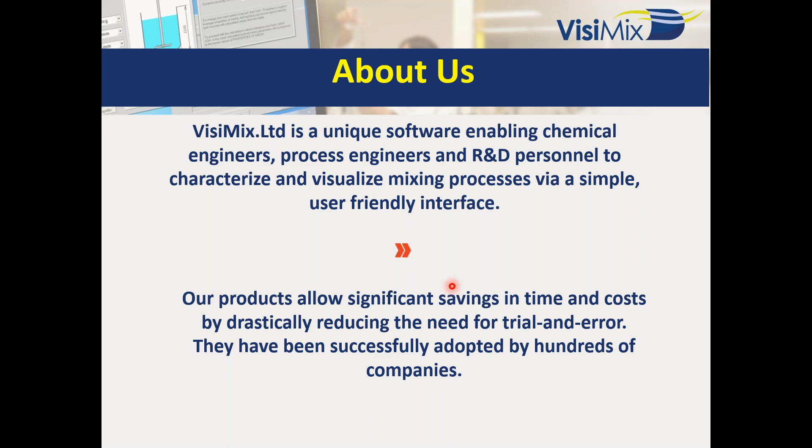The software was developed by Professor Leonid Braginsky and his team. They developed the model when they were in Russia, and they needed to provide the government in Russia answers about what will happen with the process in the next step, meaning in design, in technology transfer, or in scale-up. In order to do it, they developed a model for themselves that describes the mixing in a tank.

This model is our model, okay? This is a unique one. To solve it, we use numerical methods to solve differential equations. We use empirical data to be sure that it's relevant and representative. And this is what they developed. Once they came to Israel, we transferred all of this knowledge into a software package. Over the years, we developed more and more software. We now have more than 10 products that support the chemical industry in transferring technology and making sure that the process is safe and that you can progress in a good way.

So this is the summary of what VisiMix is doing. We solve the momentum balance. We know the velocity of the flow by a combination of fluid mechanics theories and empirical data. Once you know the geometry and the density and viscosity of the media, you will be able to calculate this velocity. But if you include other inputs, you will be able to know the solid distribution, the drop size, the heat transfer coefficient, the mechanical stability of the shaft, and more. All of them are part of process safety.

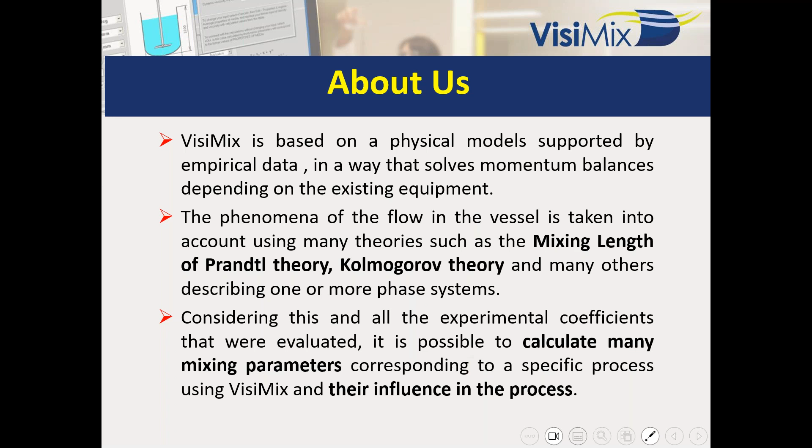In the software, we have warning messages that explain what is happening. This is the main focus of what we will do, and I will show you examples of it. Companies working in every field, as you can see, can be pharmaceutical, specialty chemicals, polymerization, oil, or agrochemicals. Any kind of material that we use in a stirred vessel is enough to use the software and try to avoid problems in operation, in quality, in productivity, and of course in safety. That is our topic.

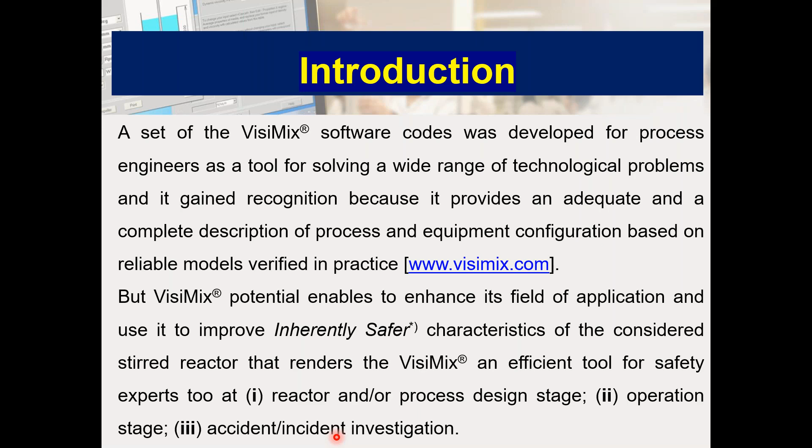So these will be the three examples that we'll talk about, taken from the main message that with mixing, you are generating conditions for the materials to interact. When conditions are a little different, it can degenerate into problems, giving us a scenario that can cause problems with safety. This is the main point.

We're talking about stirred vessels. If we do a brief literature survey, we understand that 14% of all accidents in the chemical process industry, with 71% of them related to batch and semi-batch reactor operation. So we're talking about a big quantity of problems. From time to time we hear of some explosion in one place, some problems in another place in the industry. When we collect what happened, it happened mainly in stirred vessels, batch or semi-batch.

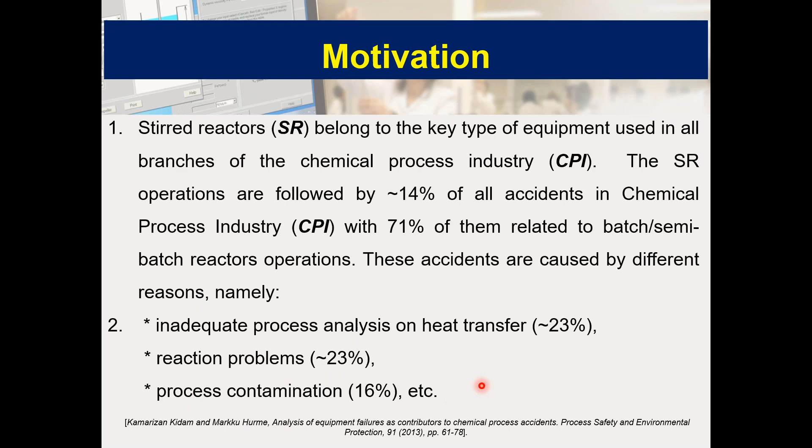Inadequate process analysis on heat transfer accounts for about 23% of the cases. Problems with reactions related to foaming and other kinds of things happened about 23% of the time. And process contamination and cross contamination, which continue to cause safety problems, is about 16%. So we have a very vast range of things we need to take into consideration.

So our concept is to introduce some kind of safety design or operation technology concept, and the way is to identify ways to eliminate hazards associated with the process, rather than to develop add-on barriers to protect people from this hazard. This was taken from a handbook of inherent safety, safer design.

The main idea is to include this in the knowledge. When we are developing a process, when we are designing, we want to take these warnings into consideration in order to avoid being in a range of work that will be dangerous.

We have different kinds of products, and we can discuss this more later. The point I want to make is that with these products, you can cover every mixing equipment with the combination of these processes and products that we are offering.

Of course, depending on the company and the mixing characterization you have, you will use different kinds of software. In any one of them, you will always get the warnings that I will explain. We'll use one of the software here, but in every one of them you can access this. You can get this kind of warnings, and you should take care, because these help us a lot in providing the information required.

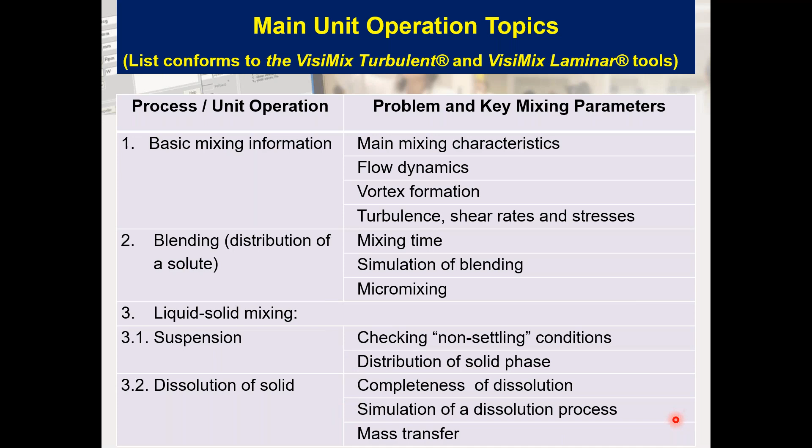After we stop the mixing, we will be able to connect between the phases and generate the two phases again. So there are two completely different ways. If we are doing a process when we want to separate phases and it is not possible, or the opposite, we need to think: it's not working well. We can generate problems with safety, how to connect it, foaming, and more.

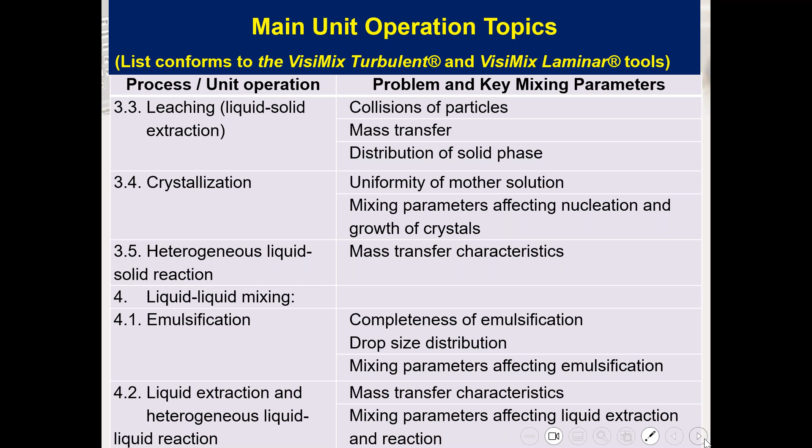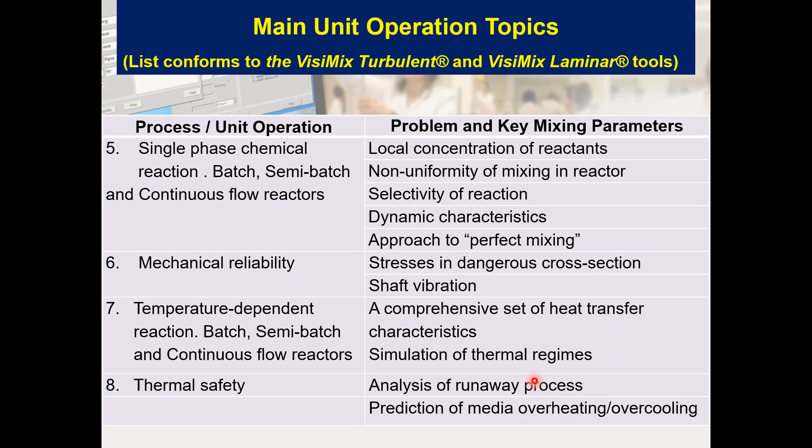So as you can see, we have many things to do. Of course, thermal safety is the main one. I will show the first example: analysis of runaway reactions and how to take into consideration overheating, overcooling, and how to do it in the software.

After we finish what we're able to do, we can show the warnings that we are providing in the software. This is the next step. We know that we're able to calculate, and we know that this software is really relevant and representative. We have an expert system of warning messages guiding our customer toward good mixing practice.

So what are the warning messages that we provide when using any software that we have? For instance, mixing power is too high to drive. We know the reason can be that we don't have enough power, because the viscosity or density of the media is higher than the design, and we haven't used the correct power motor for it.

What will happen after that is that at some place or time during the process, when we exceed the capability of the motor, you may have mixing stop, because the plant was designed for a maximum capability and you're going beyond this. Normally companies have some safety overload, and when you exceed this, the system stops, electricity drops, whatever you decide to design into your plant's safety.

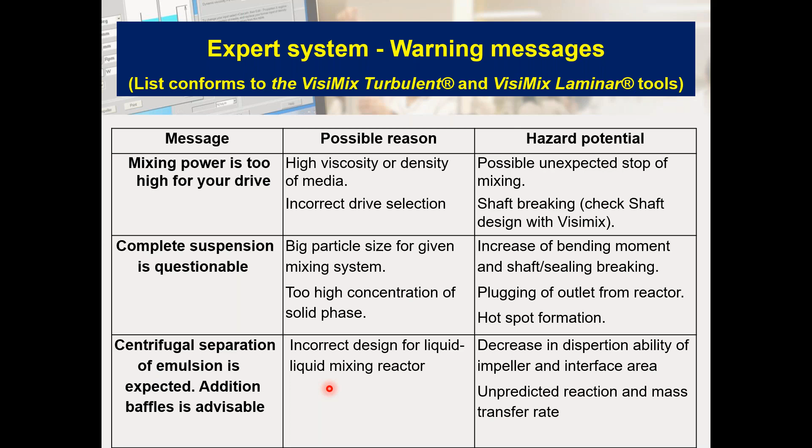You think that you have some reaction and it's not happening, and you go to, for instance, to quench, but the reaction was not happening. So you add another material to proceed, and you can have a complete other kind of interaction between materials that you maybe never think would happen.

It can increase the gas into the liquid. You can generate foaming. This foaming can generate a separation of phases.

They can grow the foaming to a place that the reactor will not be able to take.

Some very typical picture I have from some production of pharmaceutical material, where you see all the foaming in the plant, because it was completely gas. So when gas is many times more volume than the reactor is able to take.

If you go up, you go to the exhaust, and then you have another problem because it is occupied and you are generating some pressure. So all of this can happen.

Or after some minutes or some seconds, you go above or below the temperature that you defined. It is for runaway reaction, or for a very good cooling system that is going more than you want.

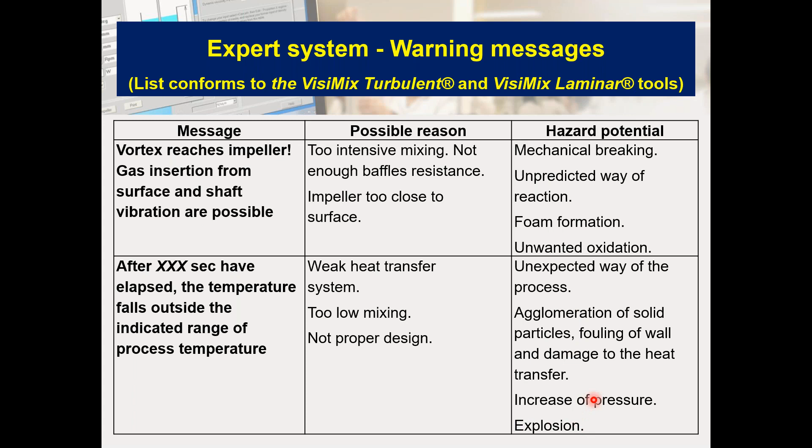All of this we can do, and the answer is that the reaction will not go in a good way, and if the heat transfer is not good, we go to a very bad situation that we want to avoid.

So this is the kind of message that we can have: shaft vibration, the heat agent not corresponding to the temperature that we expect, and all of this can generate a problem.

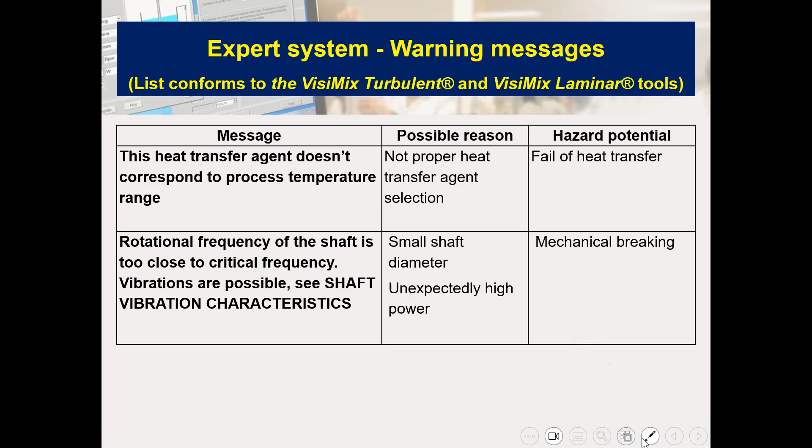We are talking about continuous flow, and we're able to generate this kind of information for you when we are talking about continuous flow and you add some pulse and you want to see how far you are from the ideal mixing. So we define how far we are from the well mixed equipment.

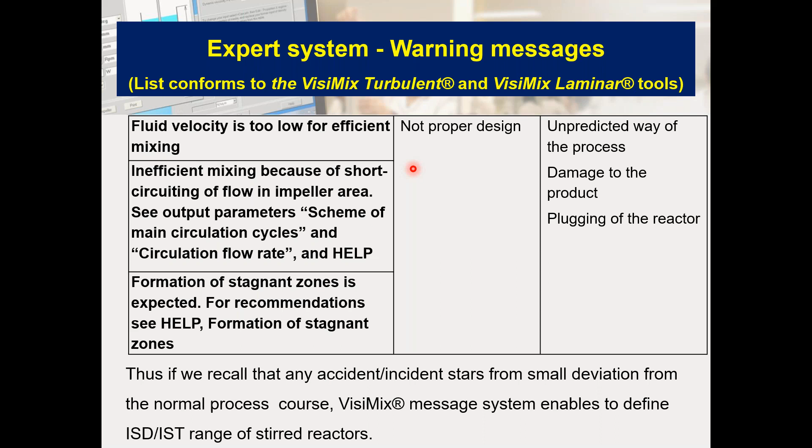And all of this we provide. So now what I want to do is provide you some examples.

We have 3 examples. I will cover every one of the examples by some explanation, and I will come back to example 1. I will open the software and show to you how we can use the software in order to calculate that.

And in this way, I hope you will have a good idea about how the software operates in this inherent safety process. So, how to take into consideration the result of mixing and the warnings we have in the company, the software.

In order to include in your hazard operations and hazard process safety evaluation. The first example is talking about a chemical reaction.

This is the equipment we use. You can see it's completely industrial equipment. And what we'd like to do in this example is tackle a safety problem in a stirred reactor, at the design stage.

What was the problem? The problem was this: the process was the following. The actual process is performed in 2 stages. The first one is initial heating, which starts the reaction.

It's very typical. You feed your material, you heat in order to go, let's say, to some reaction temperature. After that, if the reaction is exothermic, you need to keep a fixed temperature, so you may need to change from heating to cooling in order to keep the fixed temperature you want.

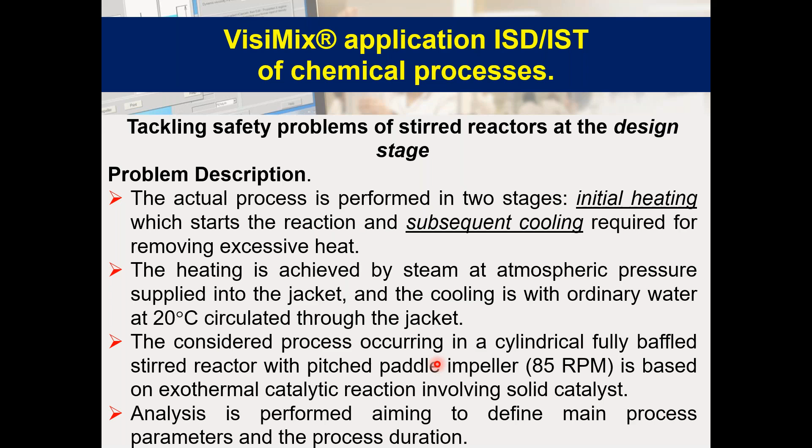The considered process is occurring in the cylindrical fully baffled that I showed before, at 85 RPM. And we did some analysis about what happened at the beginning, what will happen if we are not cooling, and after that, what we need to do, or what is the extreme point that we need to provide cooling, and more than this will be not recommended because we will have exotherm and runaway reaction. So the first step, okay.

Another point that happened in this process was that we have solids. So the first task is to be sure that our solids are moving well in the tank. So we don't have some velocity that is below the velocity required to generate slurry, complete suspension in our tank, and we have no deposition of solids in the bottom or in the top, depending on the density of the solid and the density of the liquid stage. And the second task is to talk about the runaway conditions.

All of this data we got from examples that are in the book of safety, health, and loss prevention in chemical process, in some course that has taken data from real life and tries to have the students analyze it. So we take this data and use the software in order to fit a general result.

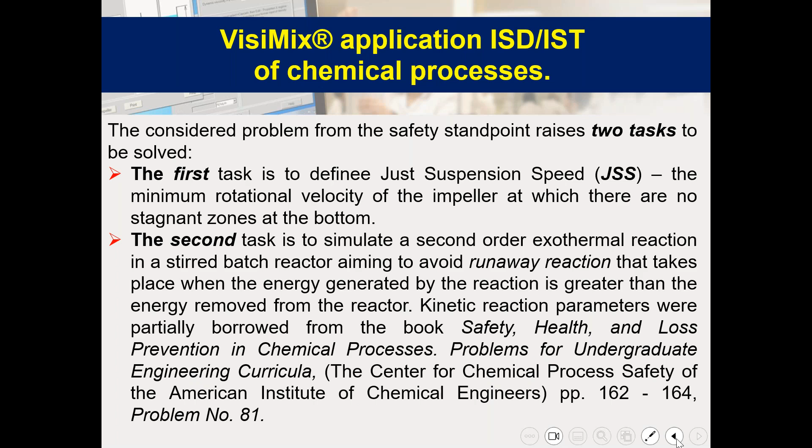In fact, what happens when you start to run the process, you will get this kind of notification. You remember, complete suspension is questionable, or partial settling of solid phase may occur. The meaning of this is, at the velocity we're working, it is not enough. We need to increase the velocity in order to be sure that the solids are moving well.

So the Njs, the just suspension speed, the minimum in this case was 72 RPM. So to be sure that all is okay, they decided to go to 85 RPM. When you are going to this number, you will see that complete suspension is expected. Okay, this was the first stage of this problem.

This that you can see, complete suspension is questionable, partial settling of solid phase may occur, and complete suspension is expected, is something that the software provides to you directly. You don't even need to ask. The software pops up the notification, and in this way you know that you are in good mixing practice. The second step

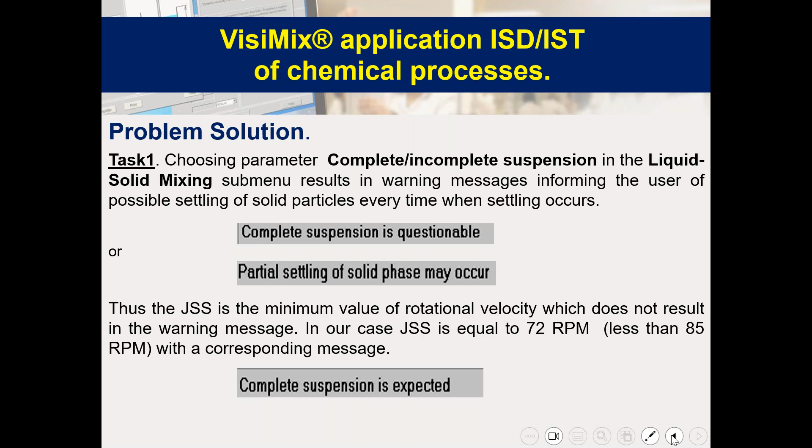is the following. The heat transfer calculation performed for the first process stage, when we are heating in order to reach a temperature, okay, we get this notification: after 443 seconds have elapsed, the temperature falls outside the indicated range of process temperature. So in the software you need to feed the minimum temperature that you accept and the maximum temperature that you accept in your process. In this way, when we calculate and see that you are passing the limit, you get the notification of how long it takes to go less than, let's say, 10 degrees or more than 140 degrees.

This time is giving me the understanding that after a few minutes, I am outside my expectation, and it is a good starting point to think about what we are doing, what is the design, or what will be the operation in order to avoid this situation. Note what happens if instead of steam we use another heating reagent. So if we don't use steam, we use Dowtherm SR-1, because we think that, okay, I will not use steam, I will use another moderate heating system.

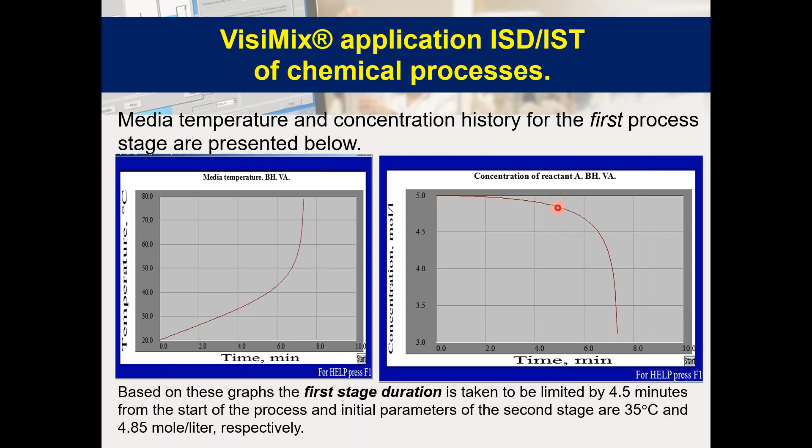So we need to be sure that if we start to see this kind of situation, we need to apply the cooling. Maybe it will not be possible to do, and we need to find another way. But in our case, this was the situation. In order to avoid the problem, and we don't like to do it, you see that at this stage, below 40 degrees, after 4.5 minutes, or after a conversion of 4.85 mole per liter, we switch it to cooling.

And when we switch the jacket to cooling, we were able to avoid the runaway and really start to bring down the temperature. Of course, I advise not to go to this situation. You need to go very low, try to control, have better cooling, and this is what we advise to do. Okay, so the duration of the cooling stage is about 5.3 minutes, and the total reaction was a very short time. It is not advisable.

Again, in industrial terms, 10 minutes is nothing. So try to extend it more. Okay, and it is possible to do. But in this specific case, in this specific equipment, that was the reason we have this example, because it was not a successful way, and it was an accident. Okay? So what I want to show you at the end is how to operate the software to analyze this kind of thing, and how we can generate this kind of graph that shows how we can change the cooling system and generate results.

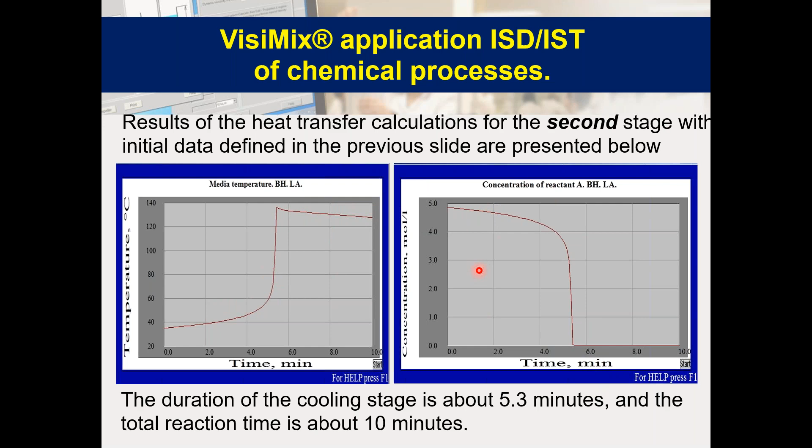The second example is a typical example if you study reactors with Professor Scott Fogler, who passed away last year, and was a very good instructor of mixing and reactors. So we have another example about propylene oxide. We consider the production of propylene glycol, PG, by the hydrolysis of propylene oxide, okay?

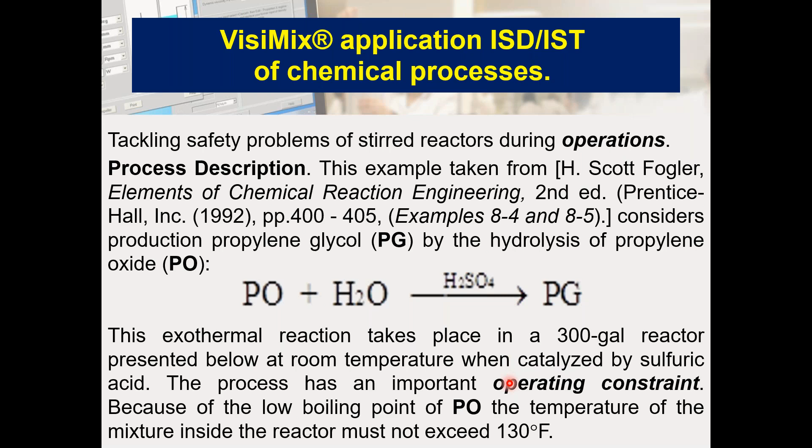And what happened here is that the exotherm in this process was catalyzed, and again, here we had a process or scale-up issue that happened when, by using the equipment a long time, we get a sort of fouling layer. What is a fouling layer? Some layer that builds on the wall of the tank, okay? When this fouling layer grows and grows, the capability to extract the heat from the wall of the tank on the process side to the jacket decreases.

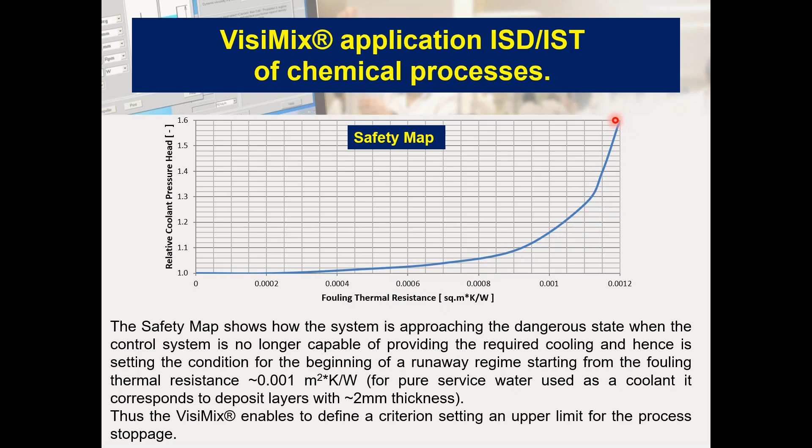And if it is decreasing, you are not able to extract the heat, and in some of the batches, maybe over 2 years or 1 year, you start to see that you are not controlling the temperature so much. So this is what happened in this example. So we change the fouling resistance, and we see how the pressure we need to run into the jacket starts to grow according to the fouling resistance, that is, the building of this thin layer. As you can see, the pressure is going up at the point that you are not able to progress. Okay, so this is the second example.

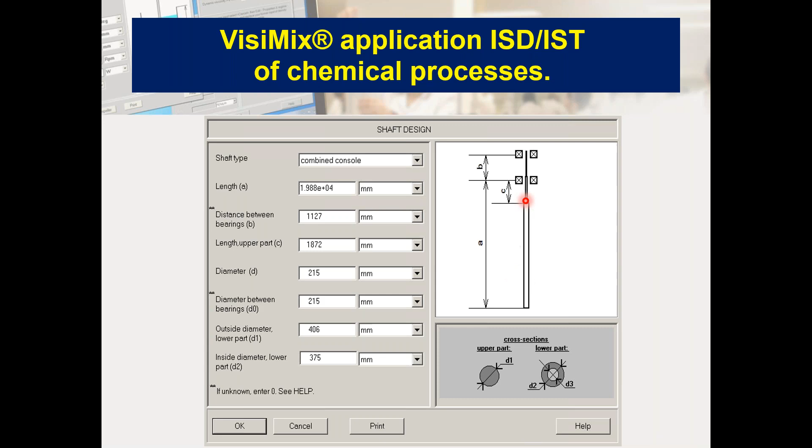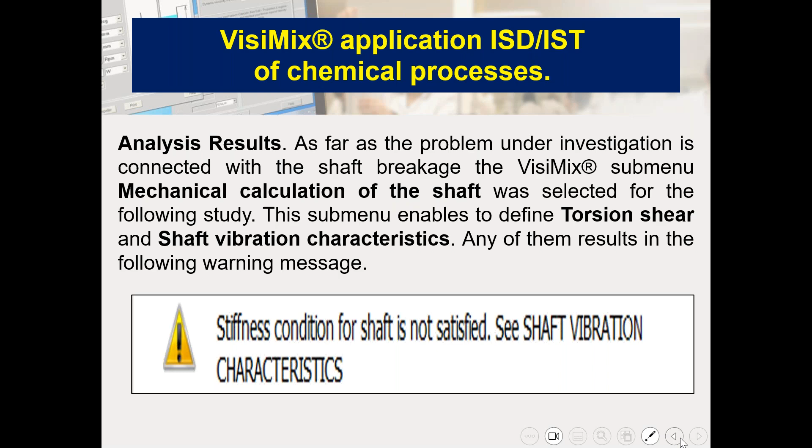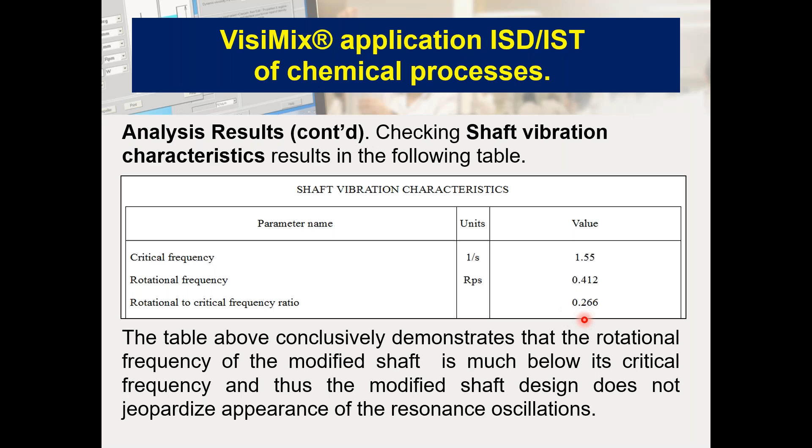And what you can see immediately is how the critical frequency is about 1 per second, and you see that what we are applying is 0.412, and we calculate it with the material of the shaft and the dimension of the shaft, and you see that we are over that 33%. And once we take into consideration another kind of shaft structure and the other design, now you see that our critical frequency will be 1.55, and we are applying only 0.412, so we are very far from the critical frequency.

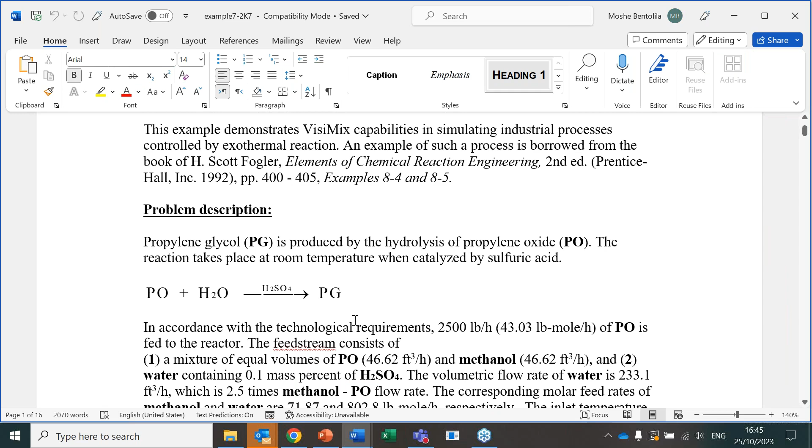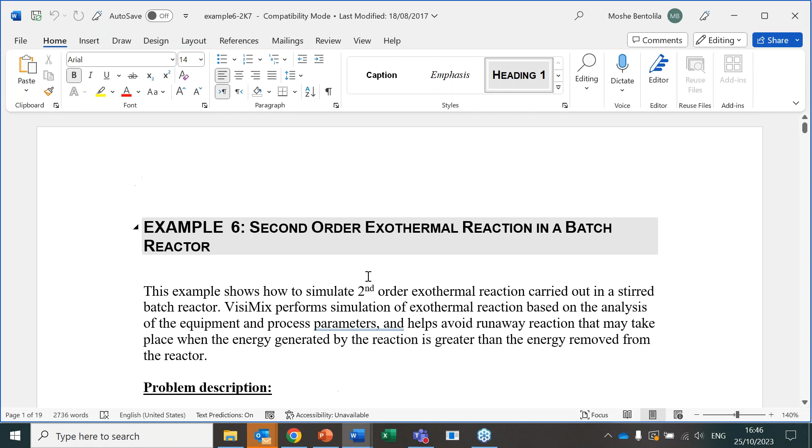All of these examples you can find on our website, and we can illustrate them. For instance, if you see the example about propylene oxide to propylene glycol, you have here the complete example, and this example is on the website. And another example about the heat release of the reaction, we have it, and it is on the website. So all of them you can see.

So in conclusion of this part, before I open the software, with the software you will be able to have a process analysis based on justified technology calculation and understand the conditions applied to your materials. VisiMix software gives you the capability to simulate different kinds of situations, solid-liquid, liquid, heat release, configure, understand the process in a good way, and it's very simple to use. I will show you in a few seconds.

And you can analyze every kind of activity that you are working on, because the company is expecting from you that you are the expert. What will happen with my process in the next step? They're asking you, okay, now I need more material. Please give me the design, how I will operate in this equipment, or I want to scale up, which equipment is good for me. So all of this you can take into consideration, and you can show what can be the problems when you are using different kinds of equipment, and of course do the safety analysis and hazard analysis in a good way.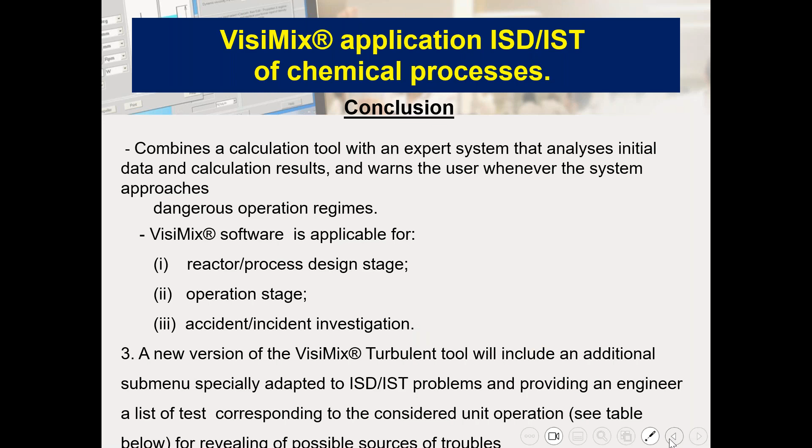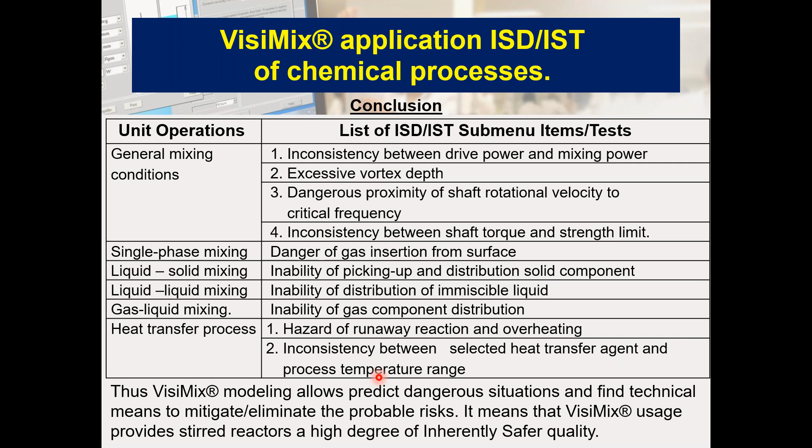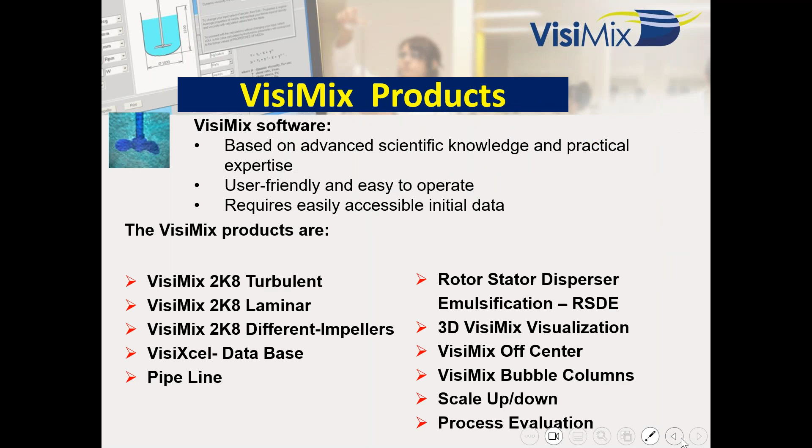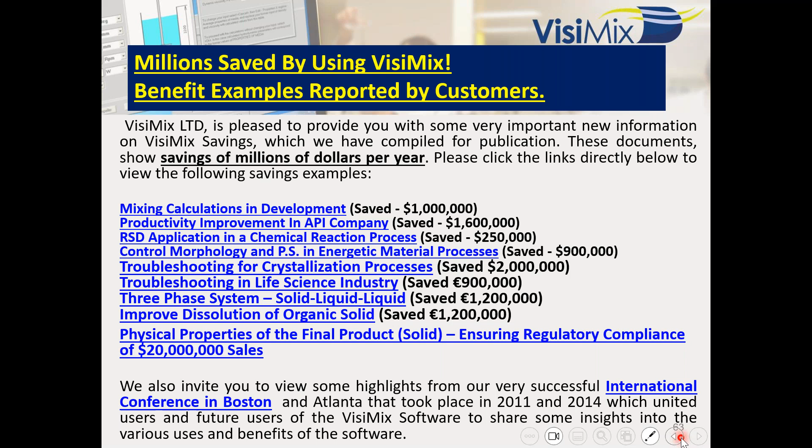And by unit operations, you can see how these lists, in our cases, were well explained and getting results from it. Okay. So from here to the end of the presentation is only the explanation about the product, so I will not cover it. I will only send it to you so you can read more about it. And what we wanted to have in the conclusion of this part is that the software gives you a capability to understand the process. We provide all the information on our website. We have examples about the use of the software in different cases, as I showed you before.

And take into account that VisiMix is a complete model. This is really our model that was proven for many years, from the lab to production. It is not a couple of correlations that you can find in the literature, and it is not only a mathematical solution of differential equations. It's really a combination of expertise that we built during many, many years and want to share with you in order to give you a better understanding of the process and consider the phenomena that happen in stirred vessels.

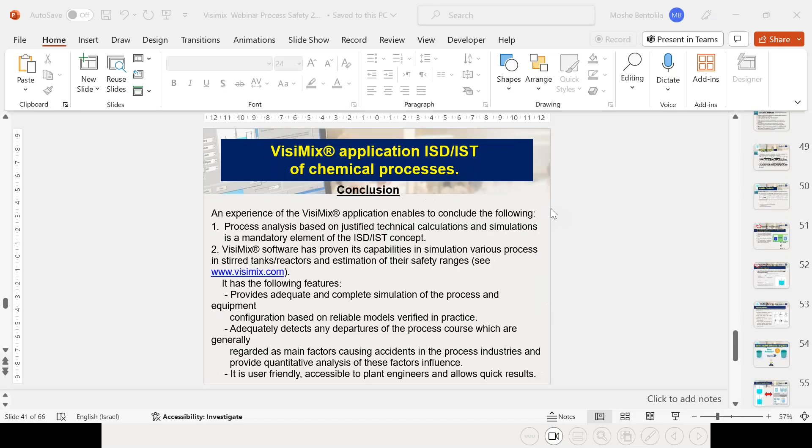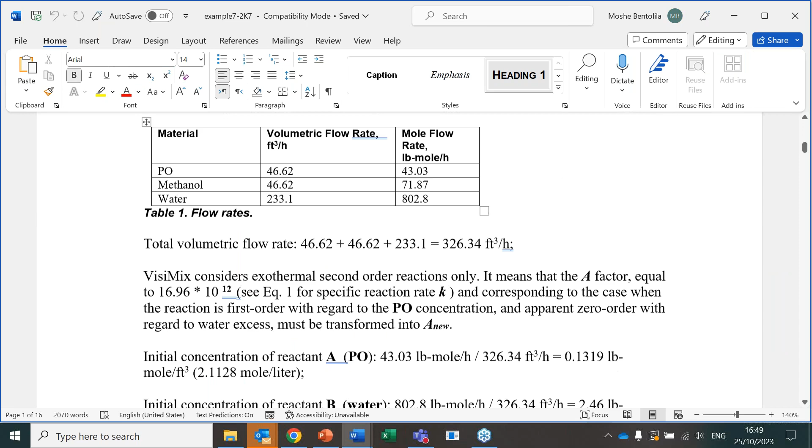So what I will do now is open the software and show you how we can operate in example number 1 that we discussed, about the runaway reaction when we design a process. When we design the heating step and afterward the cooling step, we need to be very careful about when we change in order to avoid problems. So I will come to the example. The example is here and we'll send it to you, of course, with all the explanation about the input data we need. And now I will open the software and follow exactly the example that we have in the document.

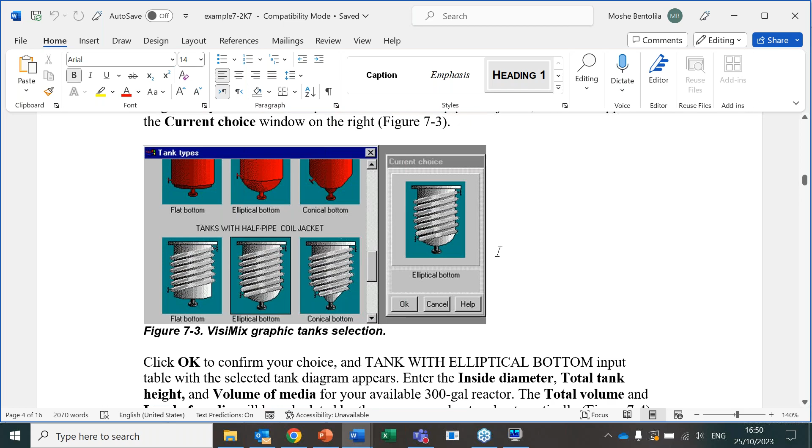So the first thing to do is look for the VisiMix Turbulent software, and the first thing to do is Project, New, and let's say the example will be heating. Okay. Now, when we click save, the software asks me for the data for the tank. Now we need to use a jacketed tank. My tank, according to the example that I have here, one minute. Sorry for that. Yes, my tank is this tank. So I will feed the data for the tank.

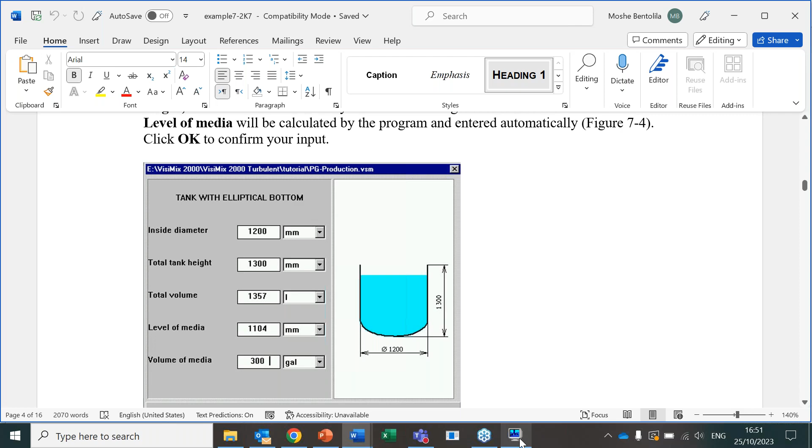Okay, here's the total volume. Okay, we need to use, sorry for that. I need to change the time. Now this will be okay. 1,200 and 1,300. And this is the volume. And the total volume that I have in my tank is 300. Okay. So we need to feed here 300.

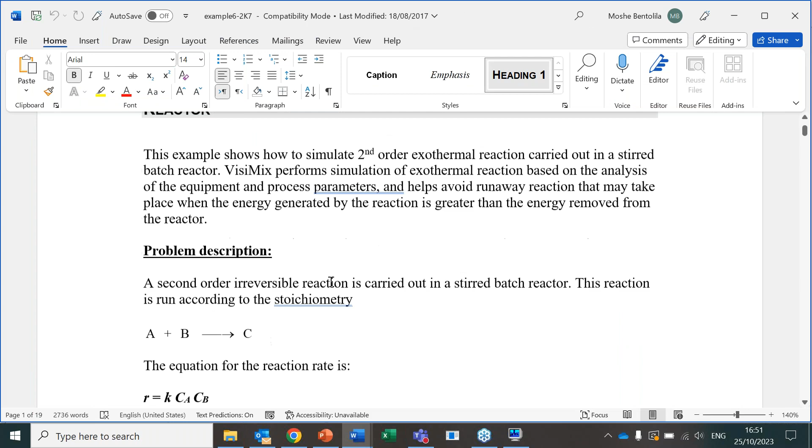Okay, let's click OK. Now the software is asking about baffles. As you can see, sorry for that. I need this example. Sorry, I will explain. I will start again. I used not the complete data. Again, process new will be heating. Yes, heating 1. And now I need to use this tank. Okay, and the data for this tank is as follows.

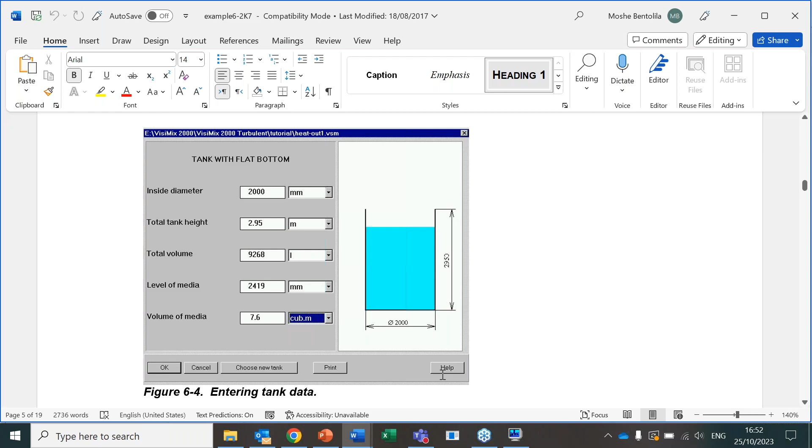Oh, now it's okay. 2,000 millimeter, 2,000 millimeter. The total volume that we have in our tank is 9268 liter, and the total volume that I want to mix is 7.6 cubic meter. 7.6 cubic meter. Now this is my tank.

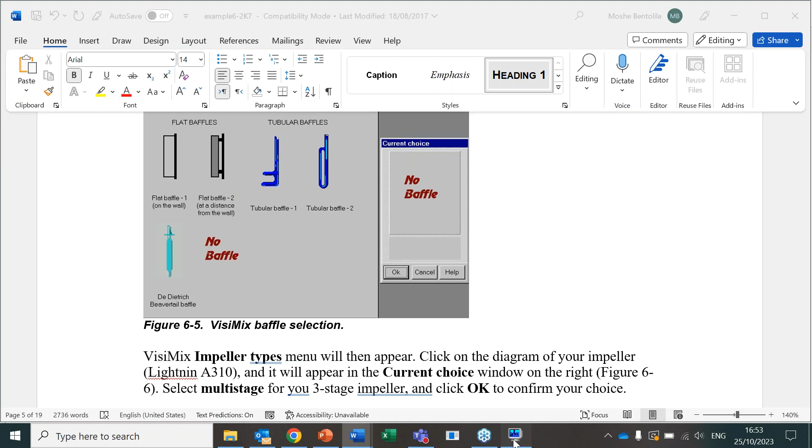When I click OK, I have no baffles. According to the process, if you scroll down, you see we have no baffles. So I select no baffles and click OK. And after that, the software asks me about the impeller that we have. You can see we have different kinds of impellers here that we can use. And if it is not inside the geometry, you can use an alternative impeller in order to solve. We are able to calculate any impeller you want.

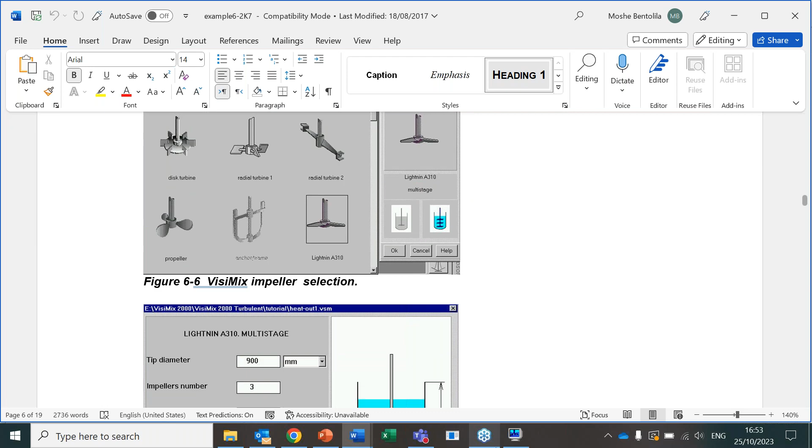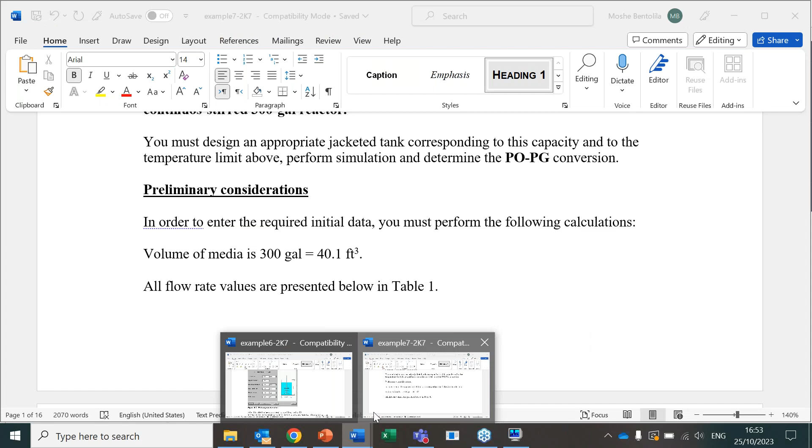In our example, we are using Lightnin multi-stage. So we need to use Lightnin A310 multi-stage. And now the software is asking me, okay, give me the data about the geometry we have in the tank. So we have 900 millimeter diameter and 3 stages. The distance between stages is 500, distance from bottom 300, okay, 500, 300.

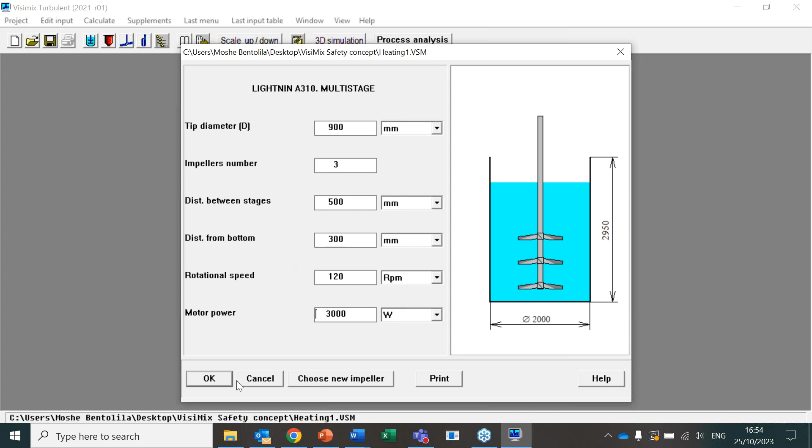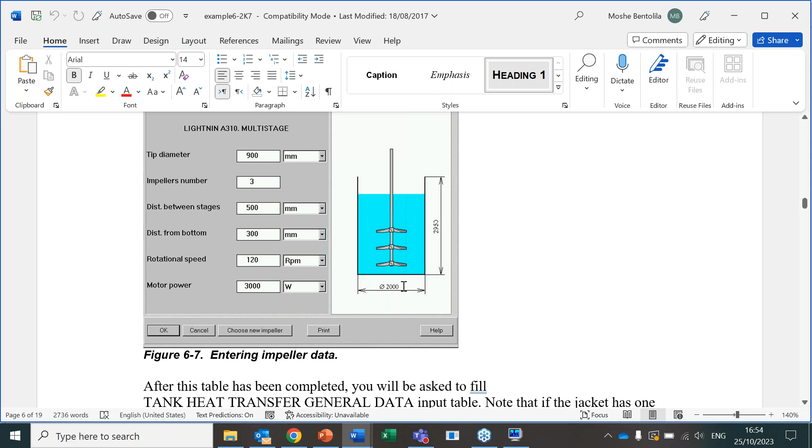We are using 120 RPM, and the motor power is 3,000, but it is your actual motor power, and it is the base to protect your equipment, your system, your shaft, and more. Once we click OK, the software asks me about the jacket and the heat transfer area. In our example, it is 2,800, okay, 2,800.

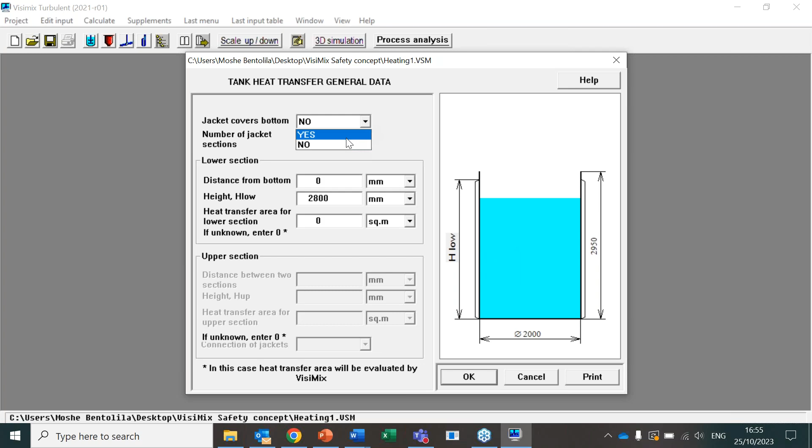Now, once we finish all the data, we need to feed the density and the viscosity of the media. In our case, I will use water. It is 1000 and the viscosity will be 1. And once you click OK, the software is able to start to calculate what we are looking for. As you see, this is the density and viscosity. And now it is my tank, ready to use.

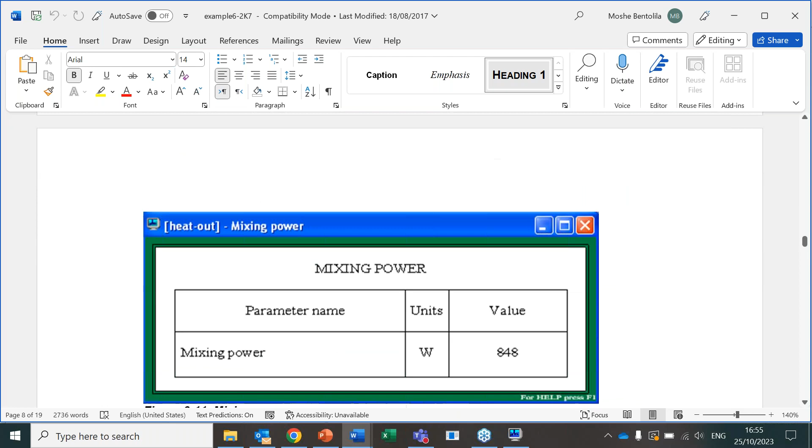What we can do, of course, is to calculate the mixing power or many other parameters. For instance, I calculate mixing hydrodynamics. You see all the data, the distribution, the Reynolds number, and more. We can see in 3 dimensions what we are doing here. Yes, here in 3 dimensions we can show how the fluid elements are moving in our tank. Okay, you can see it here.

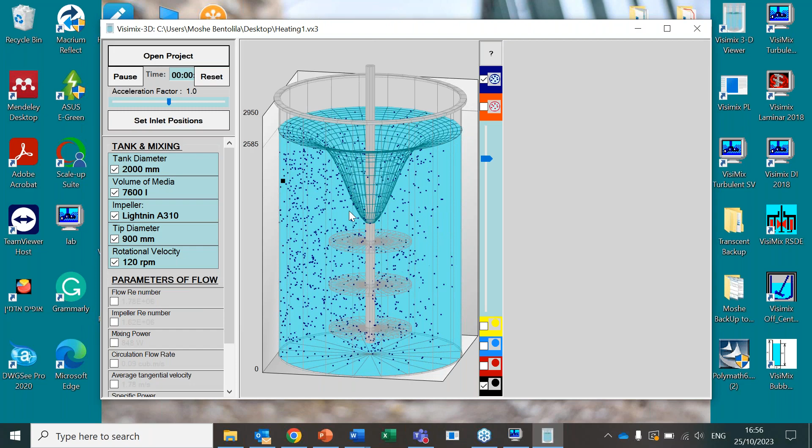We can illustrate more about how the mixing is here. It's not so axial, it's very radial. And we can reset and put the material in the top. This one, select another one here from the bottom, and we can see how the interaction is between the material in the tank. Okay, and you see that it's not so good. The solid distribution will be a problem here.

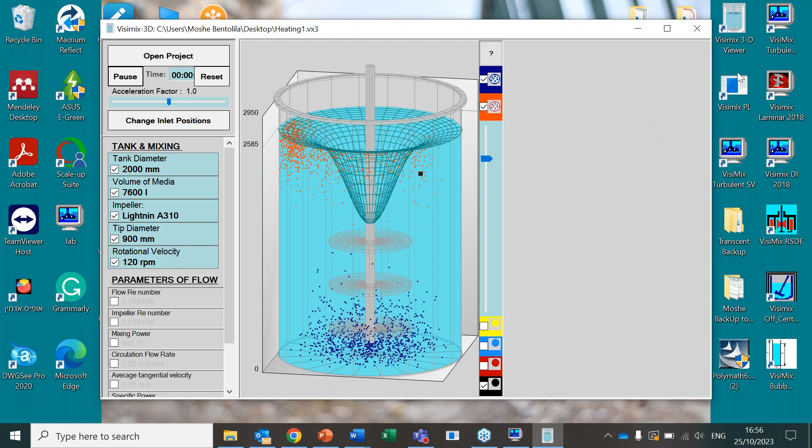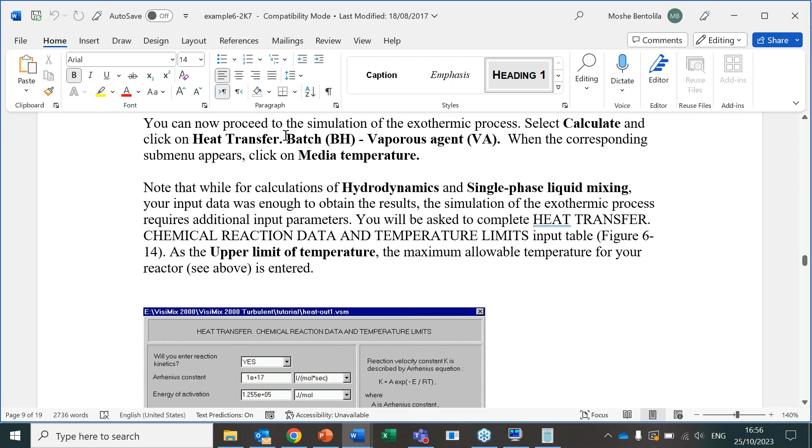Okay, and let's progress. Now, we can calculate the vortex if we want, but I want to go directly to the heating and cooling because it was my problem. You see, heat transfer. What we need to do is to ask the software the temperature in the heat transfer for heat transfer chemical reaction and temperature for a process that is batch and was heating with vapor. Okay, so what we need to do is to come to calculate heat transfer vaporous agent and ask, for instance, what is the temperature of the tank.

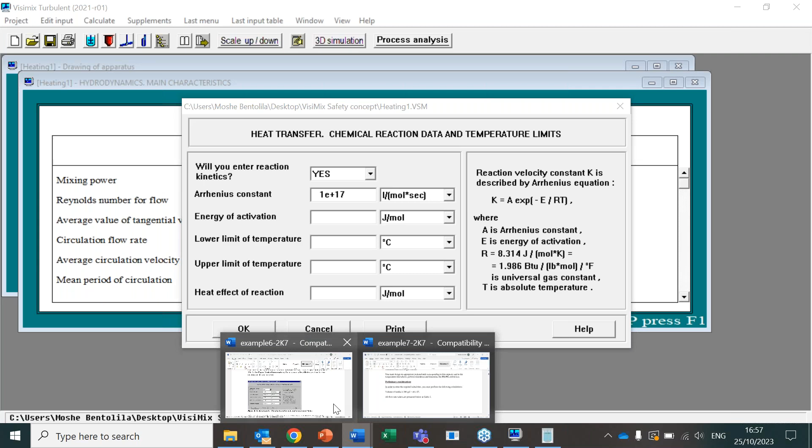Now, the software asks me, you have reaction? Yes. You have the Arrhenius constant? In our case, we have. And the Arrhenius constant is 1E17. It is very fast, you can understand. Okay? And the energy of activation that we need is 1.255 E5.

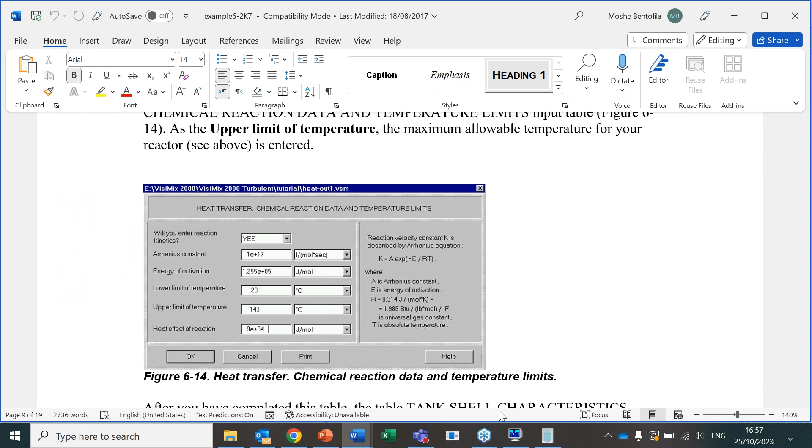1.255 E5. The limit, the lower will be 20 degrees, the maximum will be 143, and the heat release of the complete reaction is 9E4 joule per mole. Okay, 9E4 joule per mole. Okay.

Once we click OK, the software asks me, okay, what is your material? My material was stainless steel 302. The thickness we need is 8 millimeter, and we don't have fouling, and we don't know the mass. All of this we will assume according to what we are looking for.

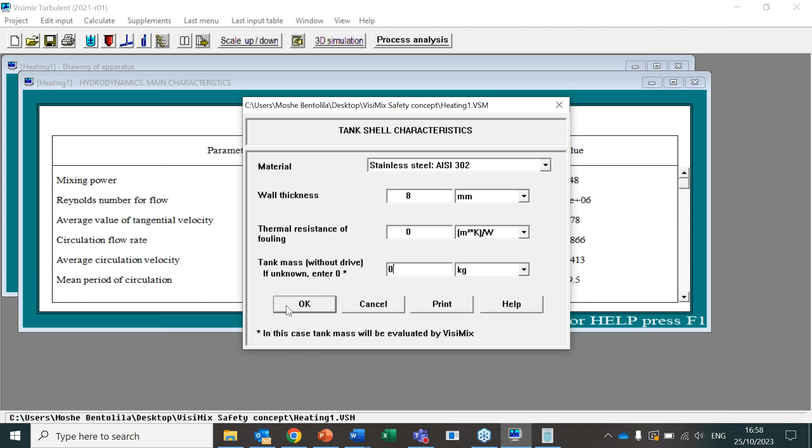So it's 8 millimeter. We don't have fouling. It's a new reactor, okay, like this. And if you don't know the mass, if you click 0, we calculate according to the data. And now we need the thickness of the jacket and the thickness of the wall. In our case, this will be 50 and 8, 50 and 8, and 8. And now click OK.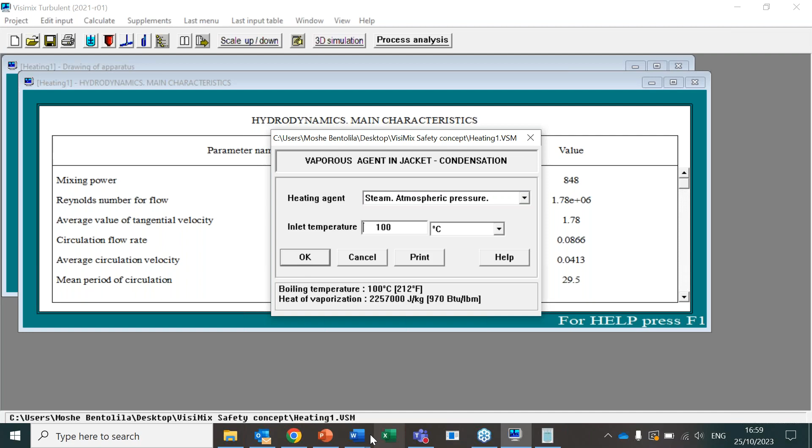Now the steam that we are feeding is at 100 degrees according to our data in the sample. You can see. Okay, and now once you click there, you need to define what is the media that you are moving. Not only density and viscosity, we need heat capacity and heat conductivity. All the numbers that we provide are at 20 degrees, and even if you are going to very high temperature, we have internally changed this data according to some correlations we have inside the software.

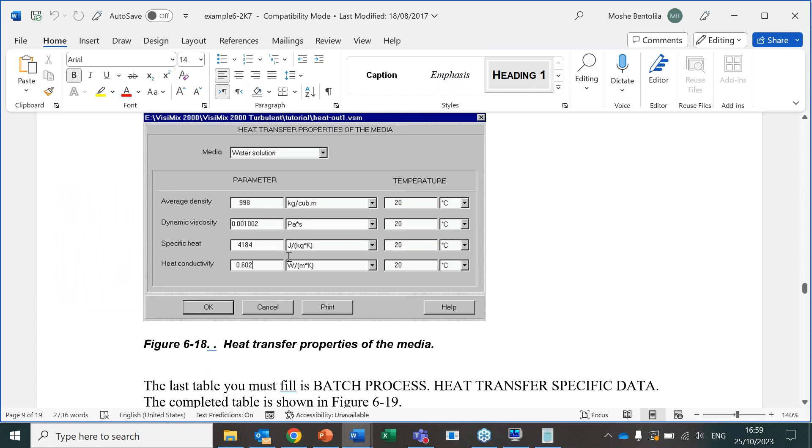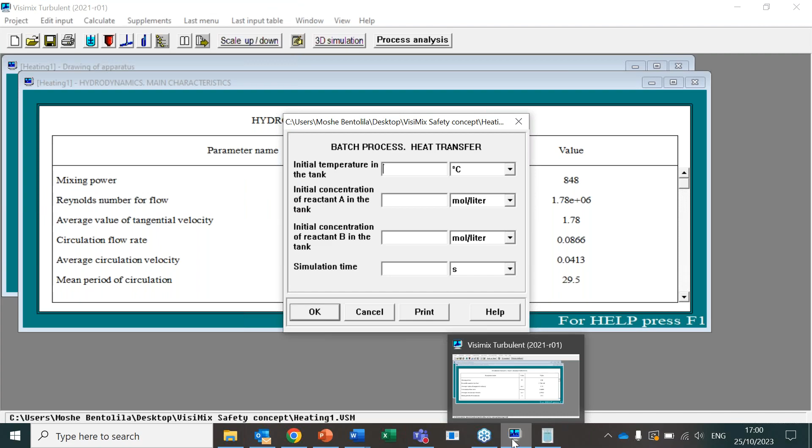So the data that we have is 998, 1 centipoise. It's really water. Okay, so I will feed data for water, 4184, and 0.6. And now we are asked to feed the initial temperature in the tank. And we assume that we have there all the mixture, reaction. So we have 20 degrees. We feed 5 mole of the reagents. A plus B give me C. And I want to calculate during 600 seconds.

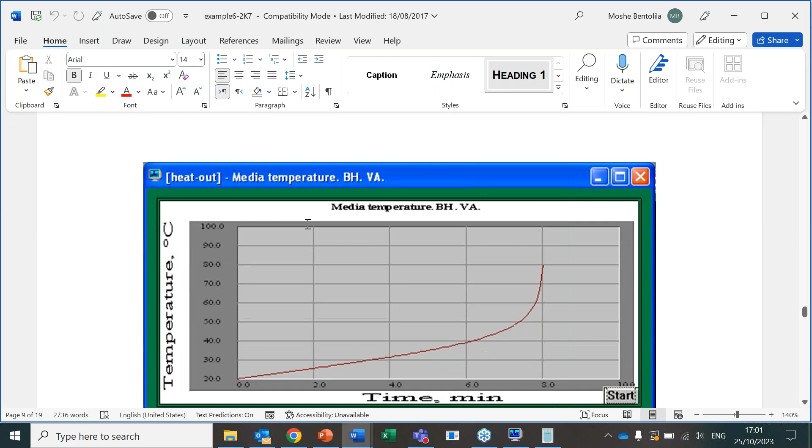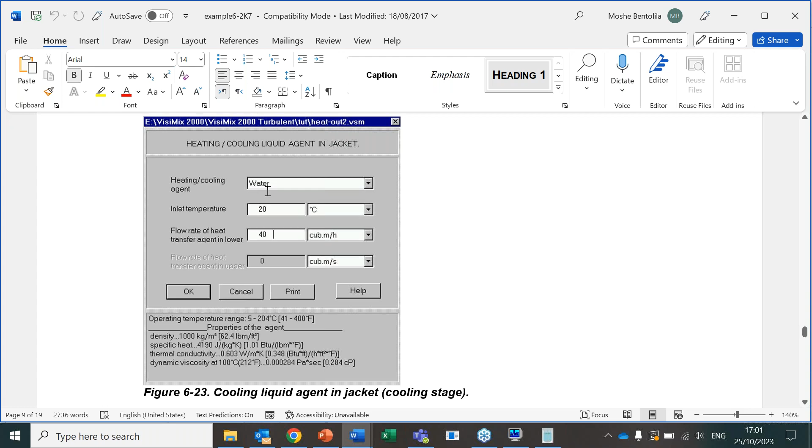Let's say now that we change to cooling. So we'll calculate the cooling with water at 20 degrees and 40 cubic meter per hour. So if we go now and calculate batch, liquid, and calculate the temperature, now it asks me what is the media we're using in the jacket. So we use 20 degrees, and the flow that we are using is 40 cubic meter per hour.

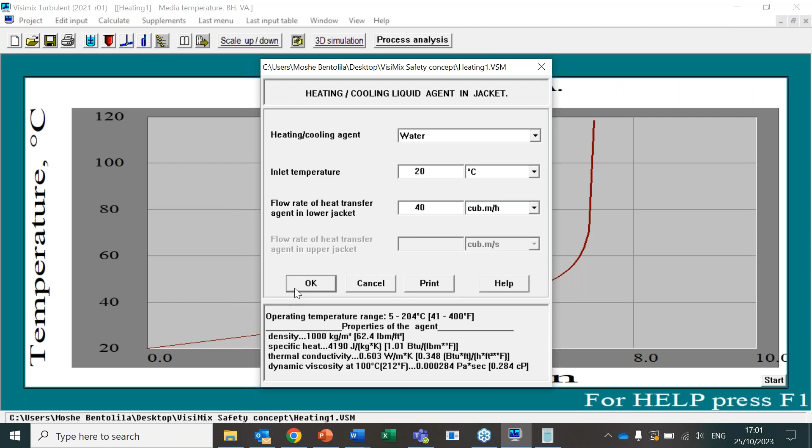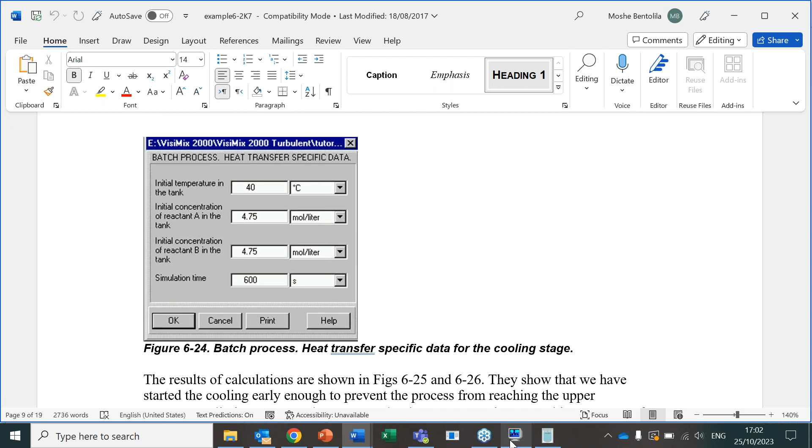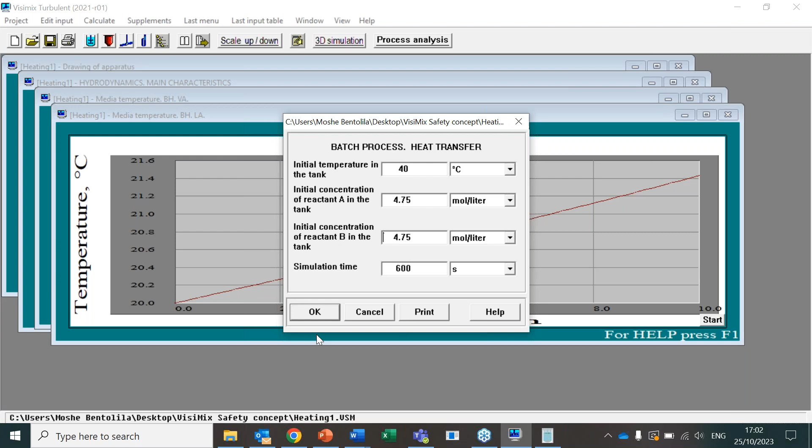And now when we click OK, you see that it's going this way, but it is not enough, because we know that we need to change the other parameter, that is what was the initial concentration of our material and what was the temperature there. So we need to change this data. How to do it? We go to the software. You can change in the edit input the heat transfer and the batch situation to 40 degrees and 4.75. This is the time that you start to feed your cooling system, your cooling system starts to work.

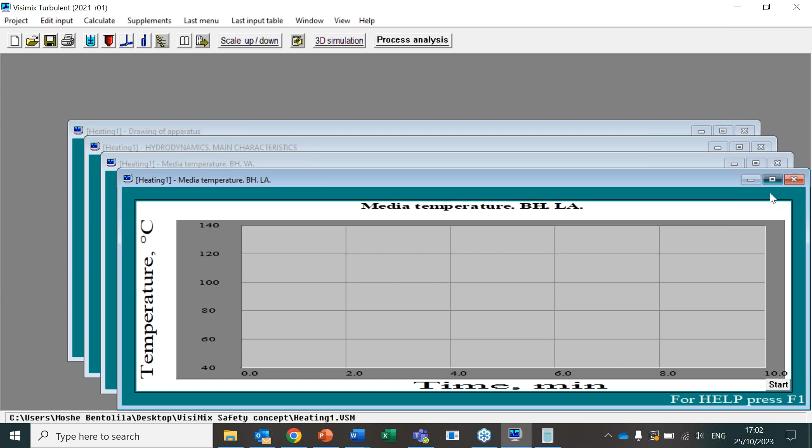And once you are applying it and you click OK, the software provides to you immediately the situation that you are really going up, but now you see that it's not going to the end, it's going down. Of course, it is not advisable to do, but what I wanted to show you is that the software is giving you all the results according to what we are talking about.

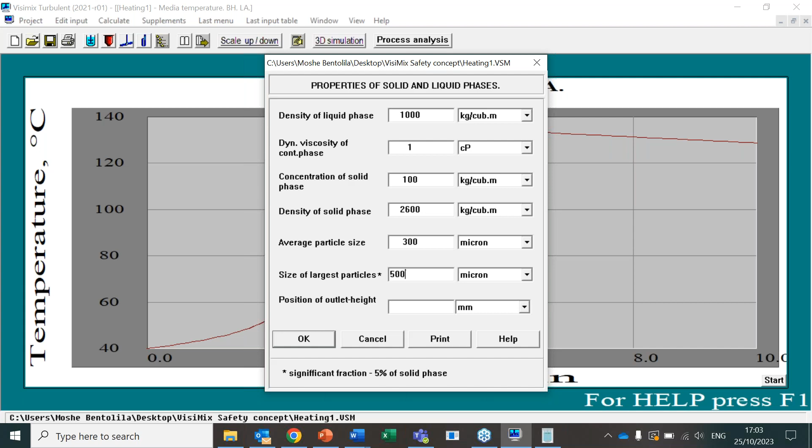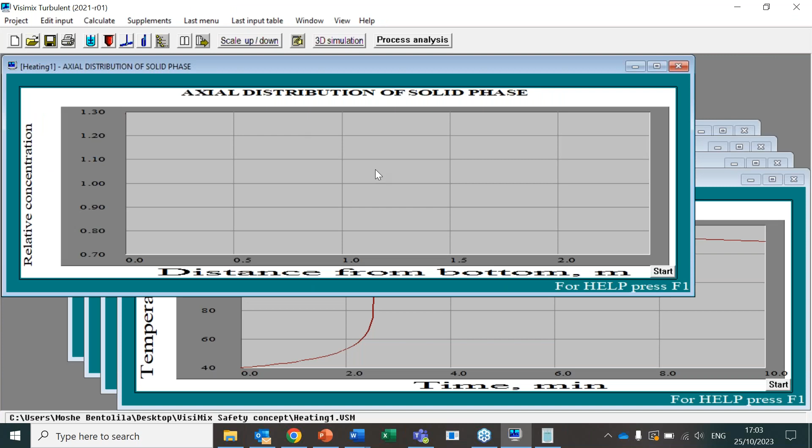And if, for instance, I feed some solids, and the density of the liquid is like this, the concentration of the solid is like this, the solid density is like this, and the particle size is 300 to 500, what we'll get is that complete suspension is questionable. So for this, we need to change the RPM. Let's say we are talking here about 85, 120, so it's okay, but the particle size is very big. We need to reduce the particle size, change the density. So this is what I wanted to show you, how to calculate. Of course, we have many things.

For instance, I can have a process analysis, and I can click here the heating, and I can compare between them if I want. This is another kind of operation where I can compare between calculations and generate tables with the results. So all of this and more we can do. We passed the time, it's 1 hour.